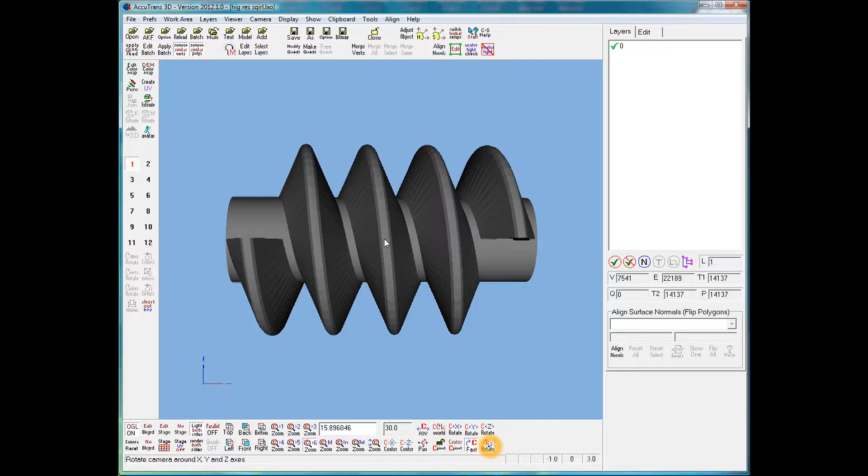Hello Tim, I've got your High Res Sqirl model loaded here. It's got good shape for the swirls. You forgot to cut the hole in the top. It'd be an okay model for normal computer screen renderings, but as a watertight mesh, I don't know, at least 20 hours to fix it up.

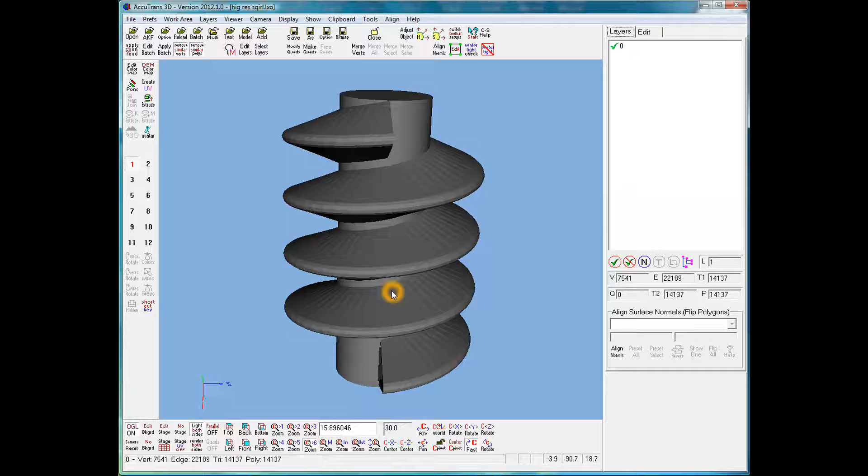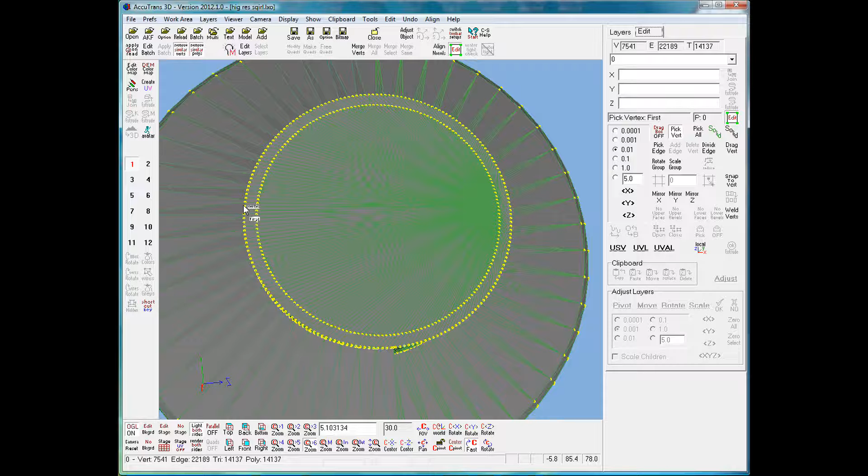Now we'll go in here. We just go up to the top, and instead of a hole being cut, we've got one set of polygons that goes just on the inner circle, plus another set of polygons on top going around the other circle. Now we'll go down to the bottom of the model here. Throughout the model there are places where there are complete holes because the triangles are missing.

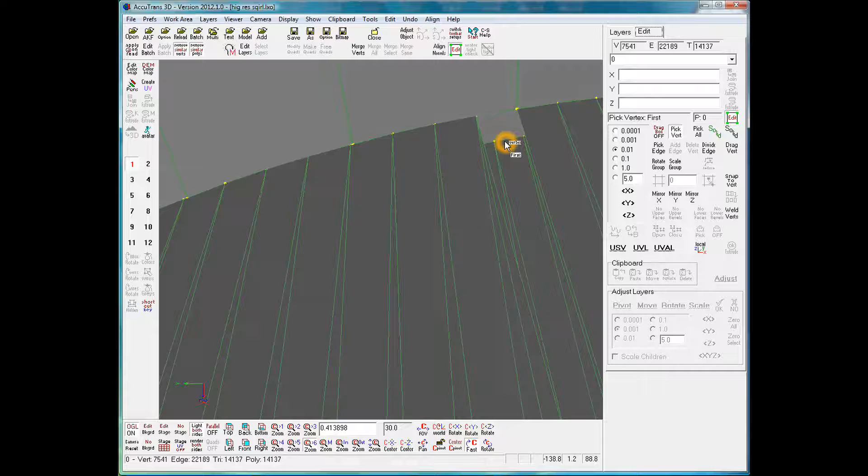So you can see here the inner section, and here's the outer section of the object. And now if we move in here, change my zoom. Okay, now what you can see happening is we've got a different number of segments on the cylindrical section to the number of segments that are on the spiral section. So what happens is we don't have a proper mesh. For every line we see coming up here, we should also have a line going up this way.

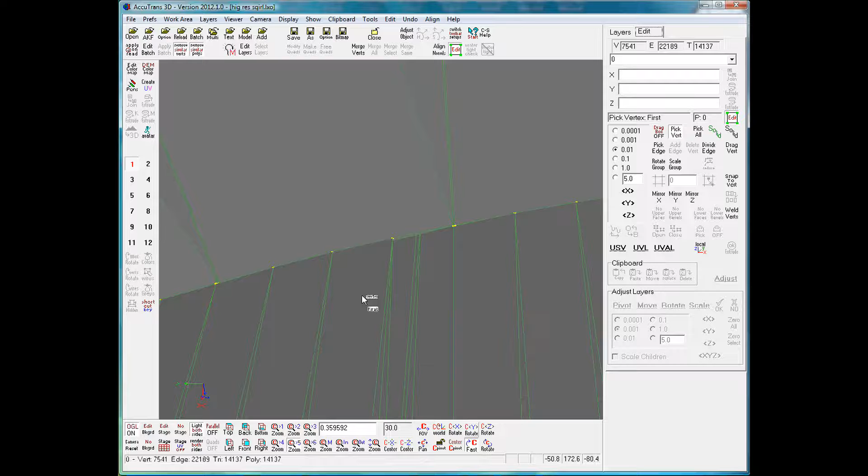So what we end up with, if you look closely in here, you can see a little triangle in there. So throughout the whole model, on both the inner and the outer shells, there are these little triangles putting things together with minimal or zero area. And that will all cause trouble in 3D printing, or at least it should for what I know.

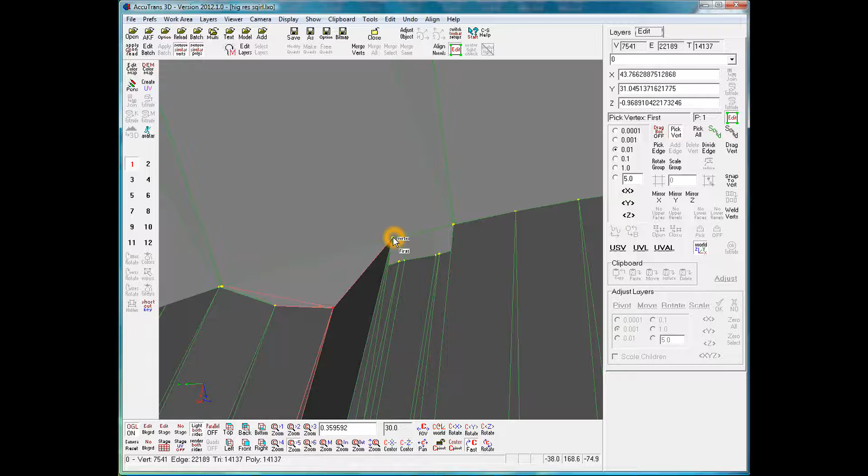Now, if I click on the vertex, and I'll just move down, and I'll move this one down, and move this one down. Now you can see that these are all attached, and then we have another triangle in here which forms this other area, and this should have all been divided to match up. Okay, put them all back to the way they were.

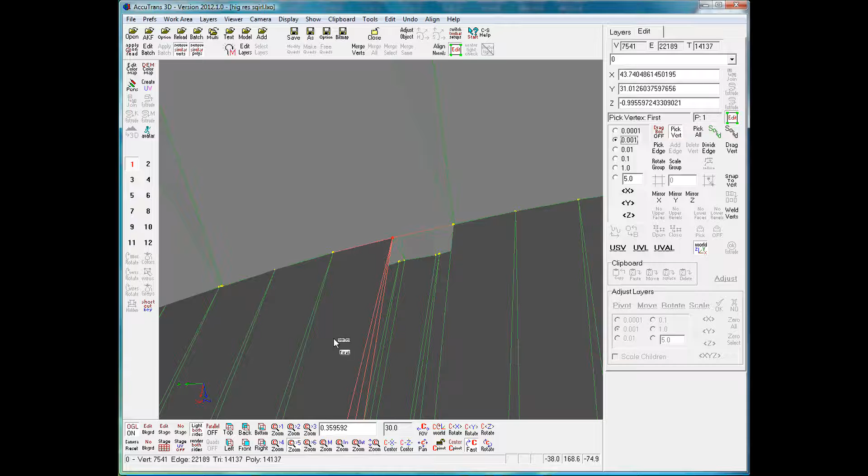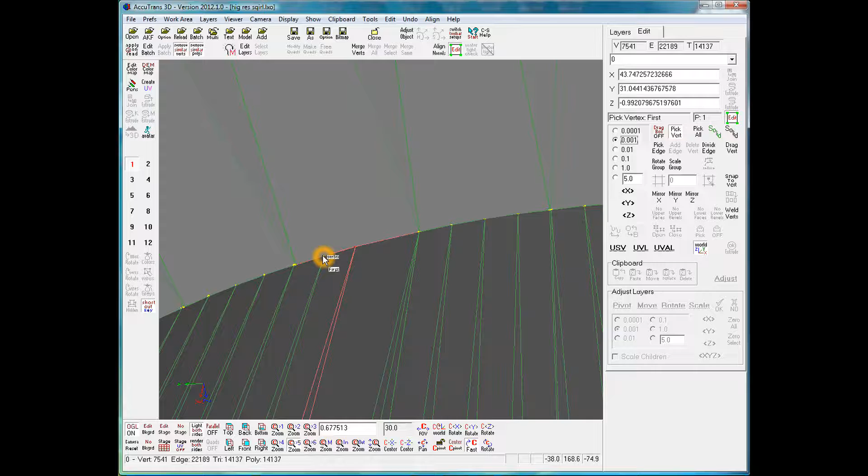Now, one way of fixing this for the hole, that's easy to get rid of. I can just snap this vertex over to here, and that's got rid of it. And to fix up in this area, I could also snap the vertexes over. I'm going to click on this button so I don't have to hold down the control key, and then I'll click on this one to get it selected. I've got two selected. I'll go snap to vertex, turn off keep relative position, and then I can snap both these right over to this one. And so we've closed up the hole, and we're matching up the area.

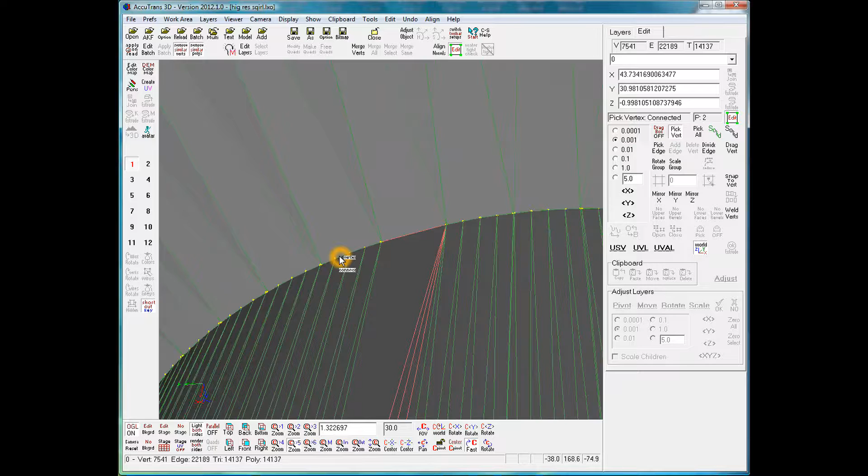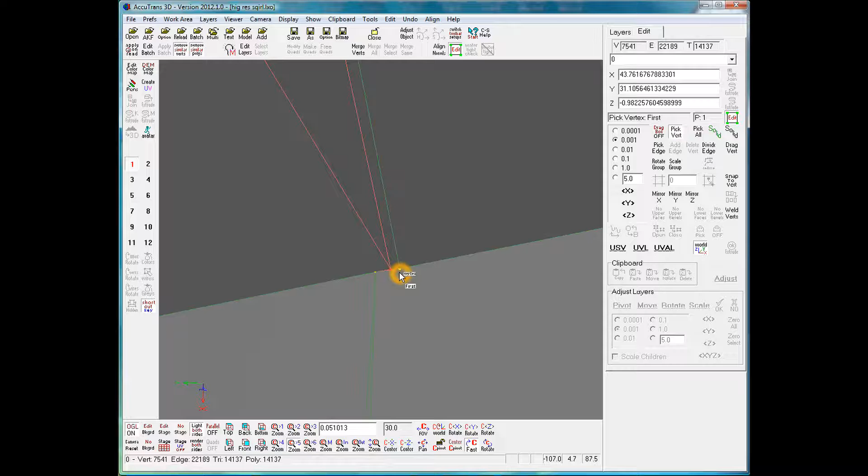And I'll say okay. Then we could come over to here and click here, and now you can see, as soon as we go around, because of the uneven number of vertices, these three don't have any match up. So which way should we move? I would think in this one we would take these two and move them. I'd have to go back to the first vertex, then switch back to connected mode, get that one, and then do a snap to, and come back up to here, and that puts them together. Now you've got those things going around the whole model.

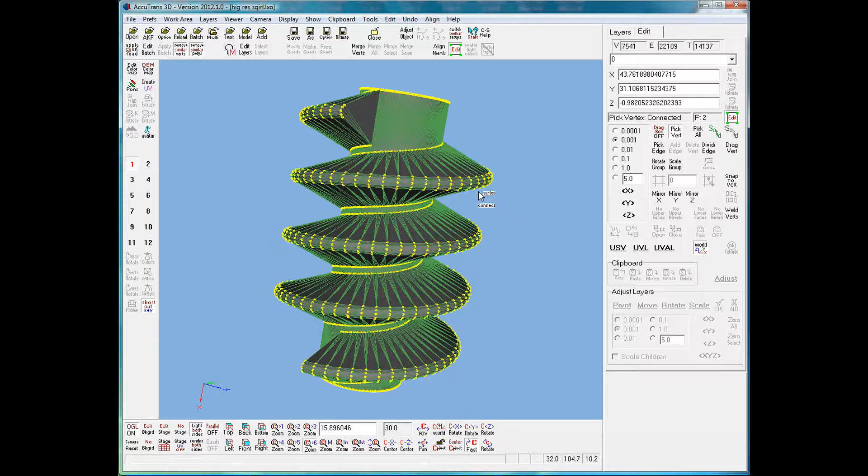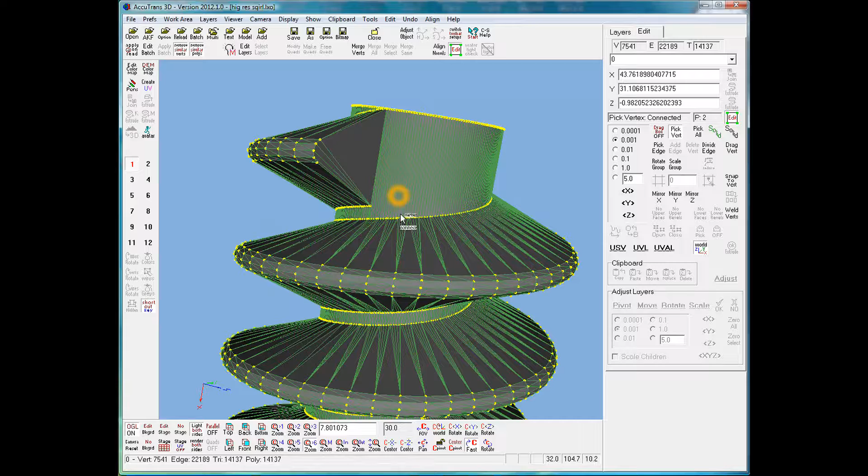Now I'll just reset the camera, and we'll come up here now. When the cylinder was generated, for however many segments went into it, the spiral should have been generated with the same number of segments, so that you're going to have the vertices lining up top to bottom. Now, when we look at this, it looks like we've got the same number of segments going around. And when we go around on the spiral, you'll see it changes.

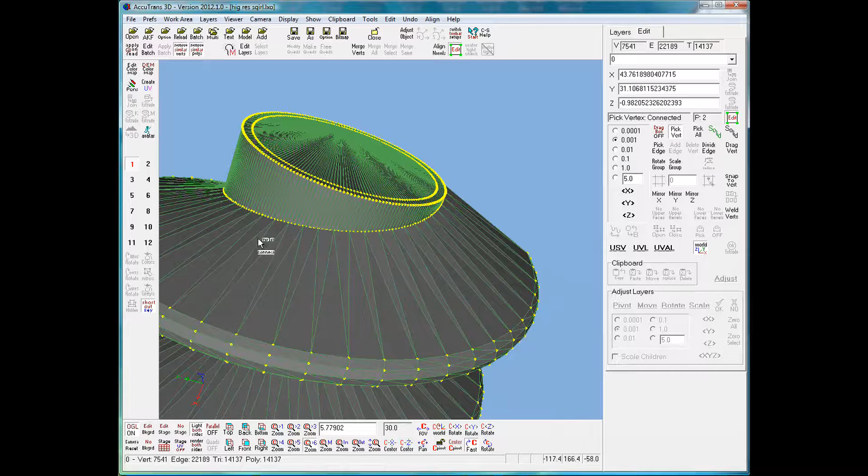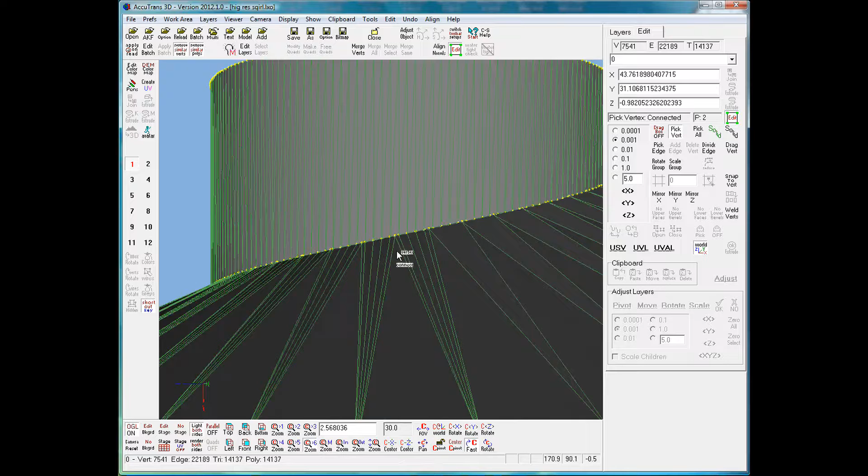Now, we're generating with quite wide spaces between the vertices top and bottom. And then as we come around, we're generating more here to match up with the vertices that are on top. And even though this is happening, we get spots in here where everything doesn't match up. We're matching up along here, but here we've got one that's matching on an edge, and we've got a triangle in there, at least I think this is one of the areas.

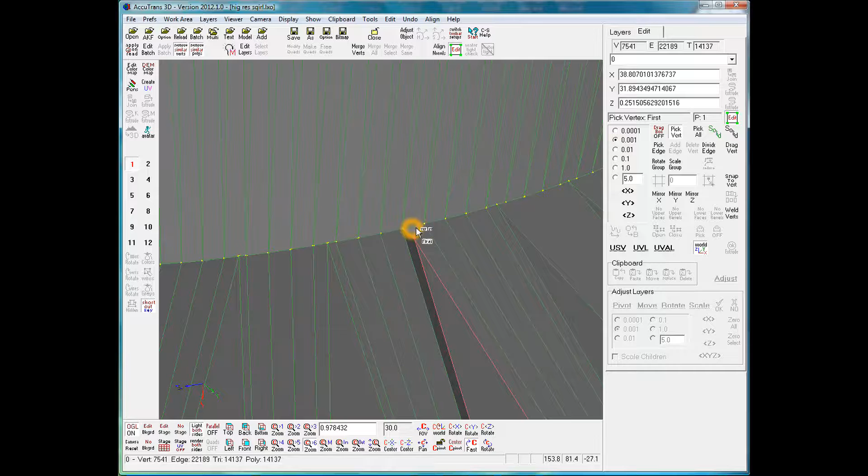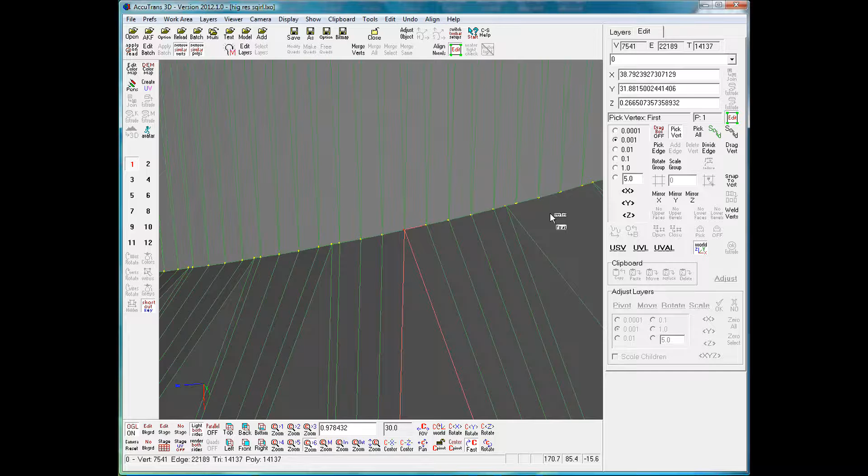I'll switch modes here, click on this one, and now I'm just going to move down and we'll see what happens. Okay, we didn't get a hole, so we're forming a little triangle in there. So we had a triangle of virtually minimal area, something you can't really pick up to turn the printer head on and off. Now if I go to snap to vertex and snap it to that vertex, I've got rid of that. So I would have to go around and pick up any of those that occur to straighten that up. This is going to happen on both the outer shell and the inner shell, from top to bottom.

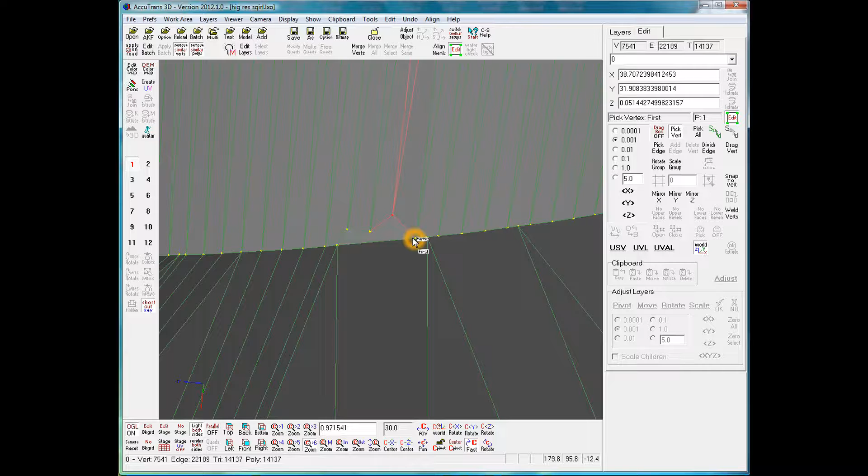Now we'll go over into this area here. Now you can see we're not matched up, different order. So now I'm going to click on this vertex and move it up, and click on this one and move it up, and again with this one, and again with this one. Now you can see we've got triangles in there all squished together.

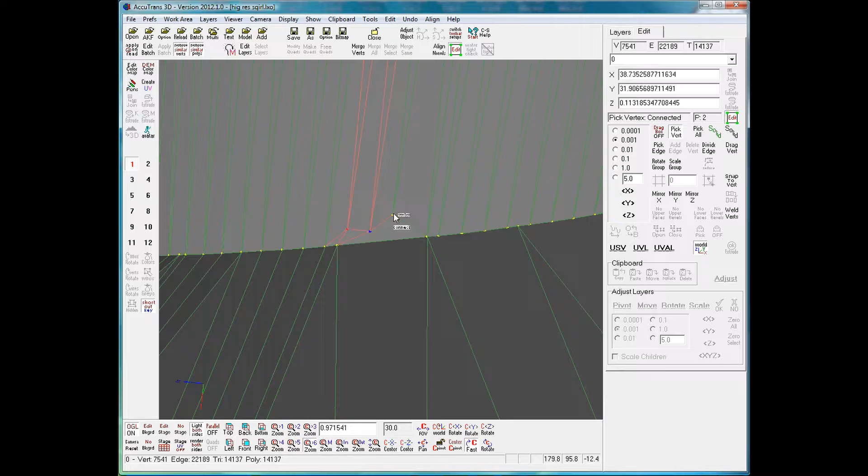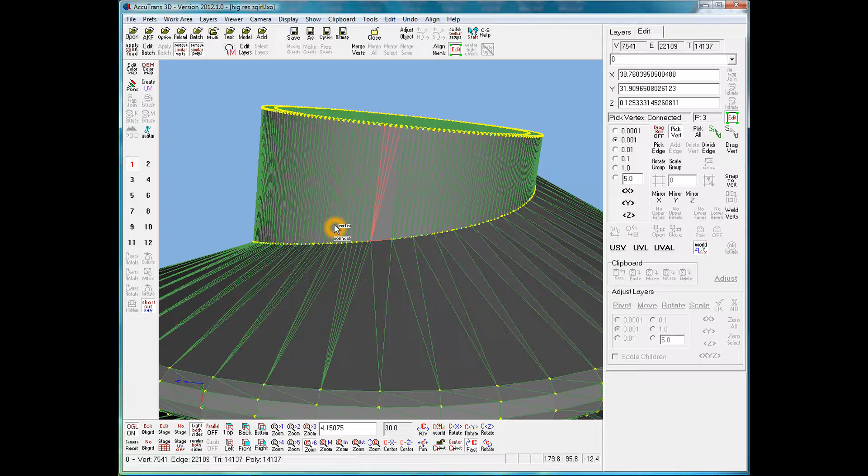So to straighten this up, I would have to snap this vertex to this one, say OK, and then select this vertex, go to connected mode, pick these two up, do a snap to vertex, connect to that one, and then say OK. And so we're straightening it up. Then I would have to go around and fix everything, top to bottom, inner and outer. That's hours and hours of work.

So what you have to see is if you can make different settings in DesignCAD to create the polygon mesh without creating this mess. Otherwise, I would guess at least 20 hours to fix this up by hand.